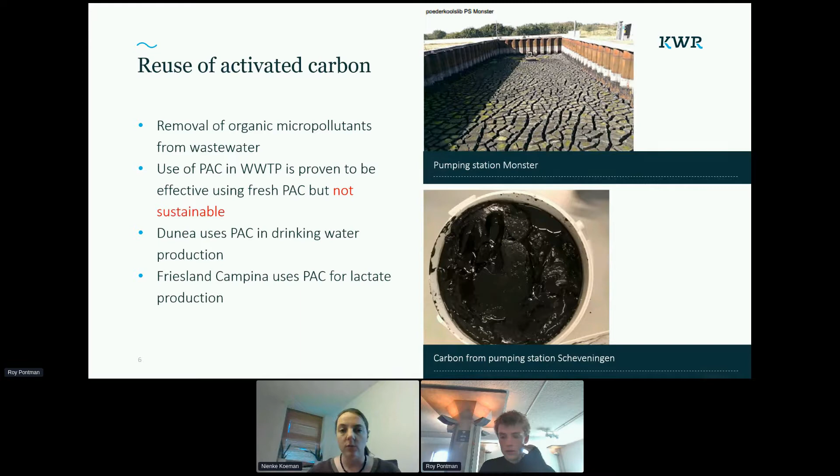For example, Dunea, which is a drinking water company, they use PAC in the production of drinking water, mainly to remove color. And also Friesland Campina is using PAC in their lactate production. And this PAC may still have some capacity to remove other types of components. And the idea of this project was that we can maybe reuse that carbon in the wastewater treatment, and that can be more sustainable. Next slide, please.

So first we have to find out whether this activated carbon is a suitable source to use in wastewater treatment. And therefore, we have to look at the technical and economical feasibility, and also other things like transport. So first, we try to answer some questions. For example, what is the adsorption capacity? Should we dose it as a polishing step after the wastewater treatment? Or should we dose it in the sludge line?

Can we expect problems with other components? Because the carbon is already used, some components are adsorbed, but they may desorb again. What is the concentration of the activated carbon in the slurry, and does that vary a lot between the different sources or per source over time? We have to look at transport, for example, distance, costs, the available volumes, and we will perform a life cycle analysis. Next slide, please.

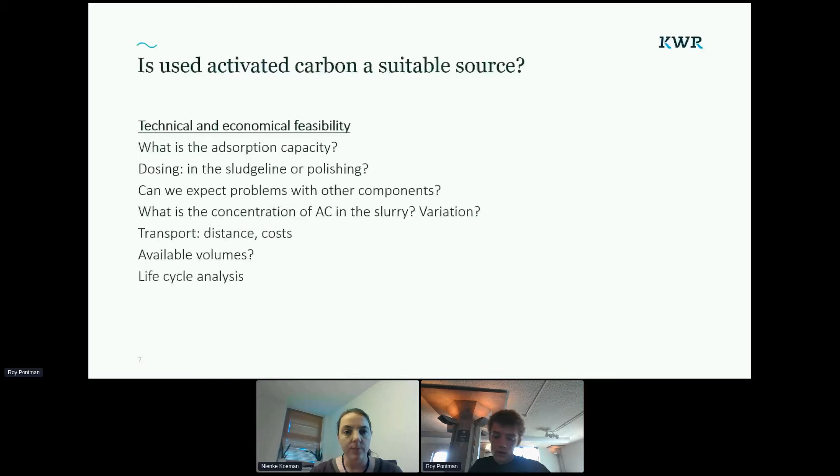So we started with the adsorption in effluent, as a polishing step, and we also looked at wastewater from horticulture. There is some standardized water that is used a lot for horticulture research in the Netherlands, and it contains a mixture of 11 crop protection agents. And what we saw is that if we use the activated carbon from Dunea, we could remove all those components, and the correlation is very good for all the different components that we tested in this mixture.

And what you see is if we add more activated carbon, the concentration goes down to very low concentrations. And the aim is to remove at least 95% of each crop protection agent. And that works if we use this Dunea carbon. Next slide, please.

Of course, we want to know how this Dunea carbon relates to other carbon sources. So we compare it with fresh carbon sources to remove 95% of the individual components. If we look at this table, can you see my arrow? In the column in the middle, we see that the minimum amount of activated carbon required to remove 95% of all the crop protection agents is 50 grams per cubic meter of this Dunea carbon slurry.

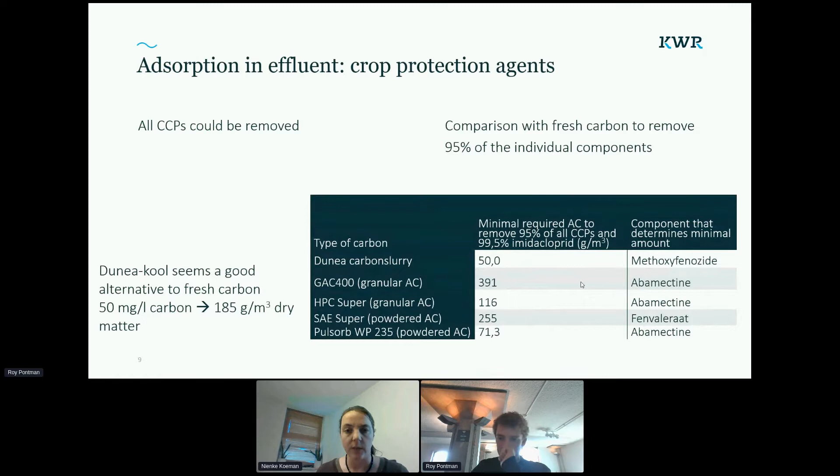We also looked at other types of components, and we used a mixture of components that is used in the Netherlands for wastewater treatment research. It's a mixture of 19 components, of which most are medicines. What we wanted to do is spike the effluent with this mixture of components to guarantee that they are present in the effluent. And we wanted to add representative concentrations, so we looked into data from wastewater treatment plants, what the concentrations could be. And the target is about 70% removal. Next slide, please.

So what we did is we dosed the activated carbon in effluent, so this is as a polishing step. The tables are very small. If we dose about 10 milligram or 15 milligram per liter, we can remove 6 components by 70%. If we dose 20 milligram per liter of fresh carbon, we remove about 15 components by 70%.

If we look at the second table, we see that with Dunea carbon, if we add about 20 milligram per liter, we remove 13 components by 70%. Which means that the amount we need to add to remove 13 or 15 components by more than 70% is more or less the same if we compare the Dunea activated carbon with fresh activated carbon. And this fresh carbon which we use is, according to the supplier, suitable for use in wastewater.

We also looked at the carbon from Friesland Campina, so from the lactate production, and there we saw that there was very little adsorption capacity left, so I didn't show a table. What we see in both the fresh carbon and the Dunea carbon is that the same components adsorb very little, and the same components adsorb very well.

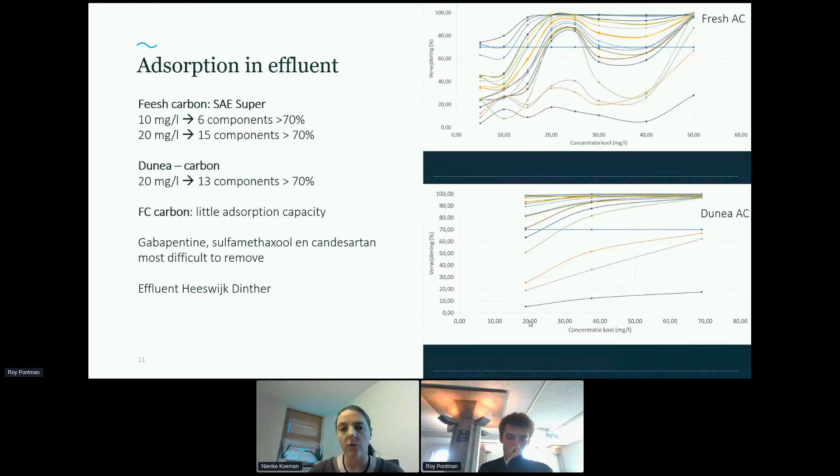So, for example, gabapentin is the lowest line in both graphs, and propranolol is the highest line in both graphs. Which is of course not strange, but it shows us that the system works. Next slide, please. Maybe you can click once more. There's a picture.

What we also want to look at is, instead of dosing it as a polishing step, whether we can dose it in the activated sludge system. So for that we did bioreactor tests, and we used the bioreactor in a sequencing batch mode, so that it's comparable to a wastewater treatment plant.

With the Dunea carbon, we dose it at the end of the aeration period, about 5 or 10 minutes before that period ends, because during the aeration period most of the readily degradable organics are degraded, and then there are OMPs left, and those can adsorb. If we would dose it directly in the beginning, it's probably directly adsorbing all the readily biodegradable organics, and we don't want that. So we will see whether that's a good option.

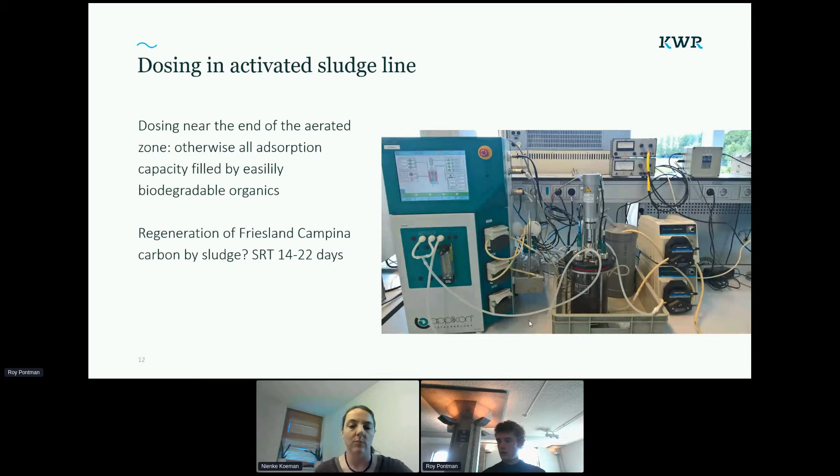For Friesland Campina, we saw that polishing is not an option at all. There are vitamins and lactose adsorbed on the carbon, and what we hope is that when this carbon is recirculated in the system together with the sludge, with a sludge retention time between 14 and 22 days depending on which wastewater treatment plant you're looking at, it's sort of regenerated. It's still really a question whether it works, but we can see. Next slide, please.

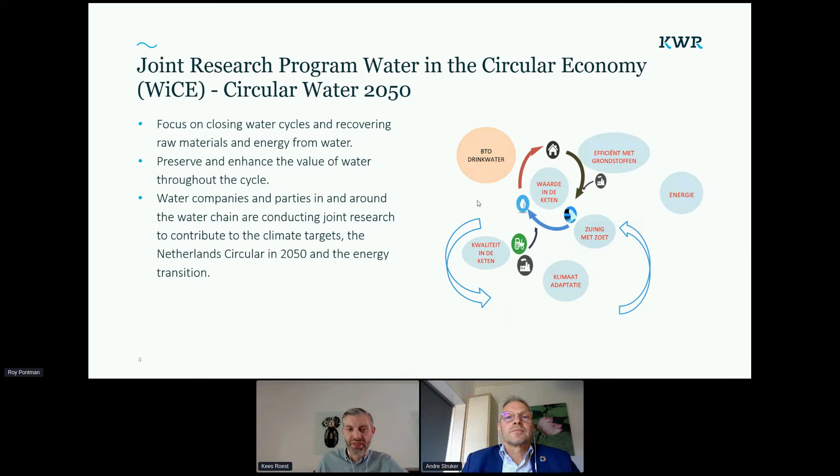And why do we focus on 2050? Besides, it's a nice number, but also because it's the aim of the Dutch government to be fully circular in 2050, which sounds maybe far away, but it's already very soon, because less than 30 years from now we are beyond 2050. So there's not a lot of time to make a transition to circularity. And before you make this transition, you also have to define what circularity looks like in 2050. So those are aspects that we investigated in this project, Circular Water 2050. Next slide, please.

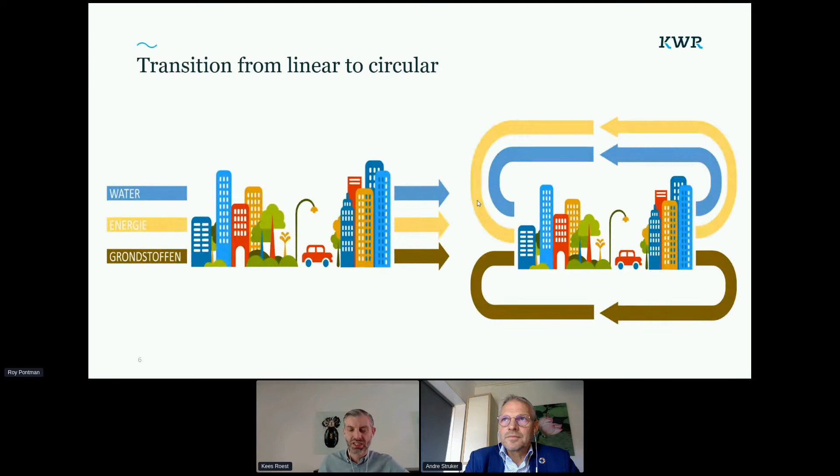Because we have to transition from linearity in water use, energy use and resources to circularity, so to reuse. That sounds easy maybe, but it's more complex and involves a lot of aspects that need to be investigated. Next slide, please. So what we did is three activities focusing on the resources that are used in water treatment, so drinking water treatment and also wastewater treatment, but also the resources that are produced when you are treating this water.

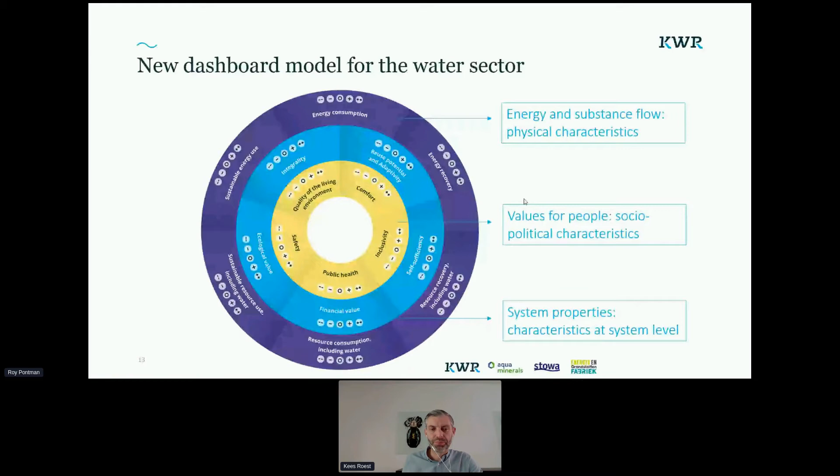So in the social foundation, we have aspects such as public health and safety, comfort. If you are going to reuse components, it can be that there are also contaminants in these components. So it's important that these contaminants are removed and that the components can be utilized in a safe and responsible way. That's why we have these 16 characteristics which can be used as a sort of dashboard to check the circularity of new concepts. Next slide, please.

So what we did, we gathered several people together to discuss circularity in 2050. We made drawings of 2050 and technologies that can be implemented in 2050 for circularity. And all these drawings and input of people from the sector, close to the sector or outside of the sector, we combined into a general picture in the next slide.

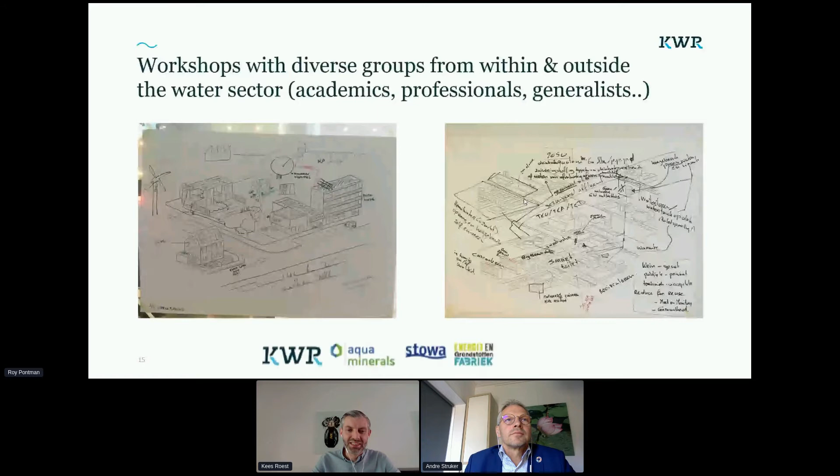This slide depicts a Dutch city and some smaller cities in the background, also agriculture, so a situation in the Netherlands which looks pretty much as it is now at first sight. But in the picture there are a lot of examples and inspiration for possible circularity in 2050. There is a lot of recovery of materials, a lot of blue-green roofs to keep rainwater a bit longer in the city and to have a cooling effect from the green parts. Of course, a lot of sustainable energy, water storage also underground and in other places. So there are a lot of possibilities for circularity.

Also some examples of decentralized solutions, because if you have to extend the existing treatment plant or need very long sewers or tubes, then it can be interesting to have some local treatment. Especially for heat recovery, which is very interesting if you do that locally. For example, from the shower, you can directly implement a heat exchanger in new buildings to reuse the thermal energy. Next slide, please.

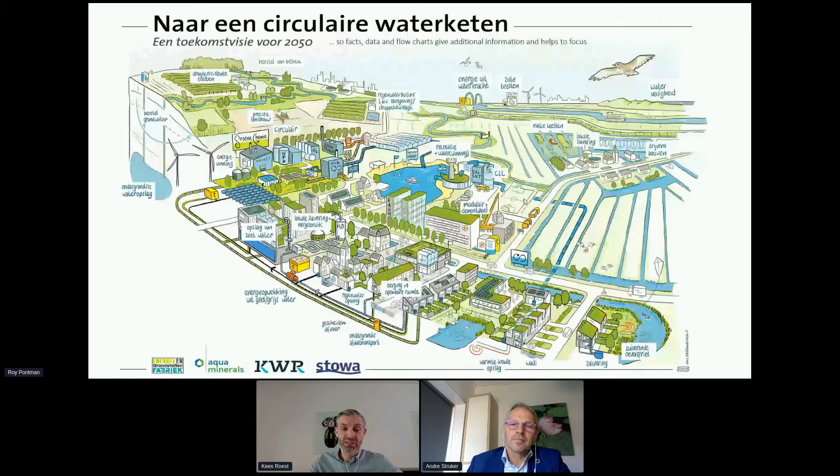So at the moment, as I mentioned, we are still finishing the backcasting. That means not only making a roadmap to this future, but also looking back to current times and then defining which knowledge questions still exist, which innovation needs need to be fulfilled, and especially important, at which moments you need to make choices. That's also depicted in the next slide. If you want to go to this future, at certain times you need to make choices. So if you look backwards, you can define at which moment you need to make a choice, and then also define which knowledge question needs to be answered before you can make the choice.

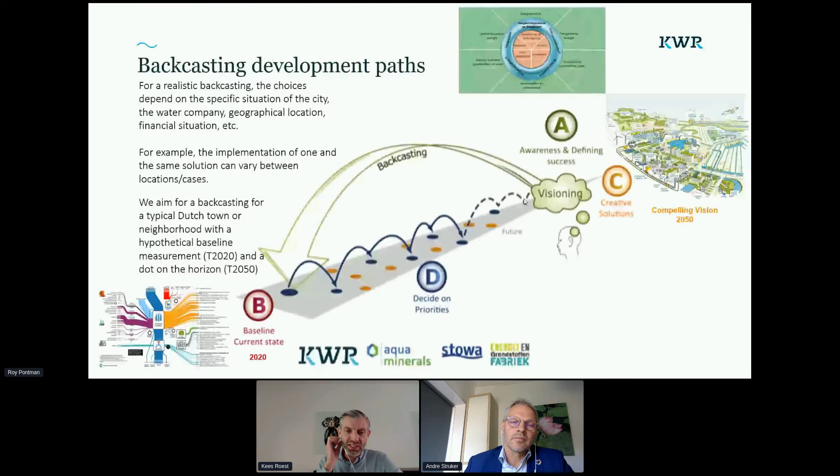So that's very important, I would say. Then the next slide, nearly finished with the presentation. So a bit concluding our study about impact and opportunities for a fully circular urban water cycle, focused on 2050. We delivered a sort of scorecard which can be used for defining circularity. You can compare the current situation with new concepts and the future, and then see if you score better on all aspects or if some aspects are even decreasing in the score. So that can help you to make choices.

We also depicted a dot on the horizon with an inspirational drawing, which should trigger discussion and help us to move forward to a more circular and hopefully fully circular water cycle in 2050. And together with the backcasting, this should give policymakers and administrators, the responsible people, handles, tools to develop towards circularity in the near future. Next slide, please.

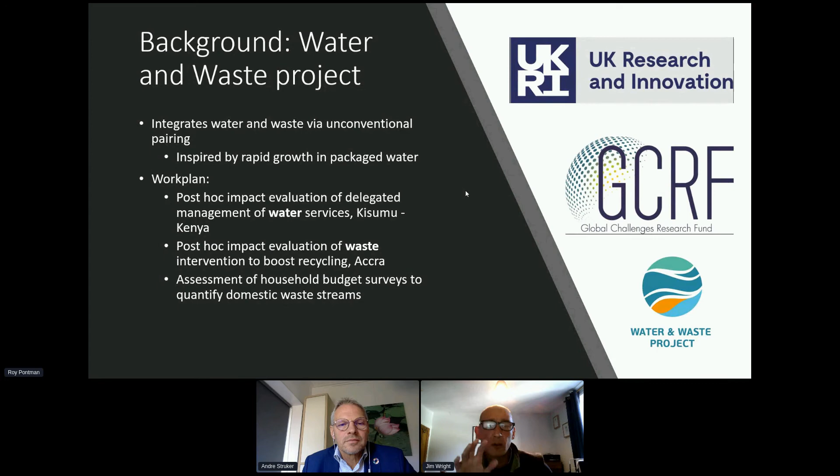As a very brief summary, this is part of a bigger project that brings together the ideas of water and waste management in off-grid areas. Why bring together water and waste? This is a project based in two countries, Ghana and Kenya. In one of those countries, Ghana, most urban households currently drink water from plastic bags. In contrast, in Kenya, the government has banned plastic bags. So the project is looking at evaluating a waste intervention in Ghana and a water intervention in Kenya. Next slide, please.

So let's move on and just talk about the water intervention in Kenya, in Kisumu. It's a particular model of delivering water services known as delegated management. That's a model that's been used in Kenya, in Tanzania, and in Mozambique as well. And as the diagram on the right shows, a utility sets up a subcontract for the local delivery of water services, typically in a high density informal settlement. And that subcontract goes to a master operator. The idea is that reduces non-revenue water loss and hopefully allows some localized expansion of the service network as well, thereby improving water services. Next slide, please.

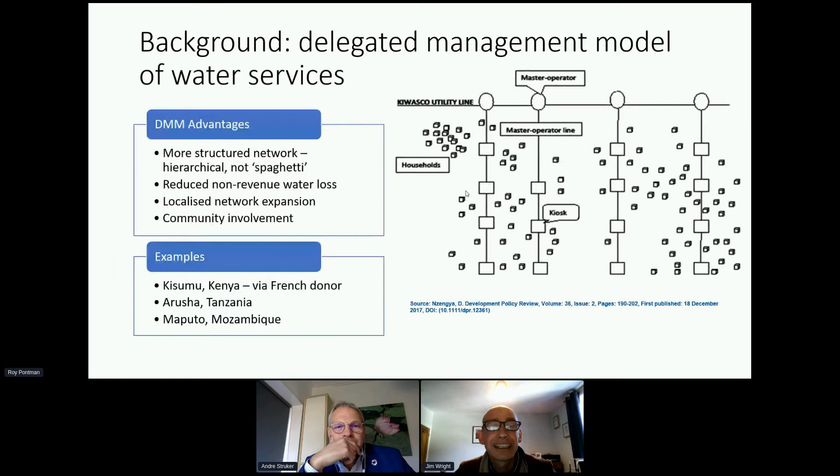So there's been quite a bit of work on the delegated management model. It's looked at things like revenue recovery and also impacts on pipeline breakages. But there hasn't actually been very much on water quality impacts of this style of service delivery. So that's our focus in the project, to look at the water quality impacts. Next slide, please.

So here's a map of Kisumu on the shores of Lake Victoria in Kenya. And if you look at the graphic there, the green lines are areas that are managed directly, pipeline infrastructure managed directly by the utility, KIWASCO. And the red areas and the red lines are places where the water network's management has been delegated, subcontracted to a master operator under this delegated management model.

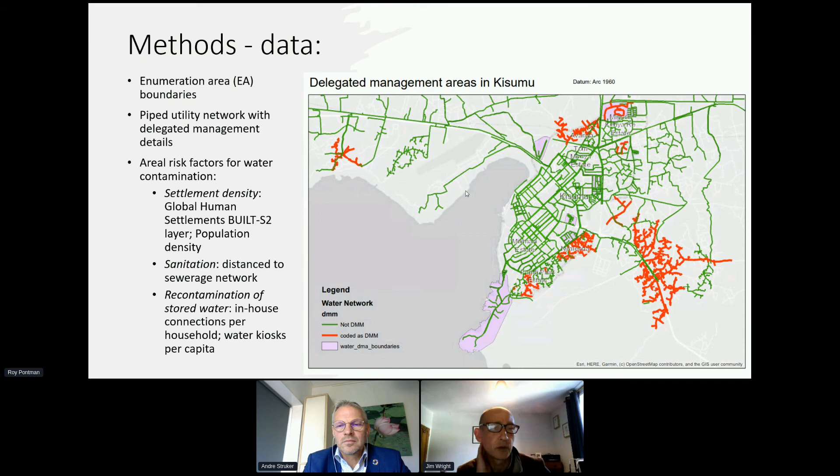And so to do our evaluation, what we're interested in doing is looking at risk factors for water contamination in the built environment and seeking to select control areas that are broadly comparable for those risk factors between the red and the green areas. So, for example, in terms of sanitation provision. So there are a series of risk factors that we've tried to control for, essentially around settlement and population density, sanitation, and also the nature of the connection to the water network. Next slide, please.

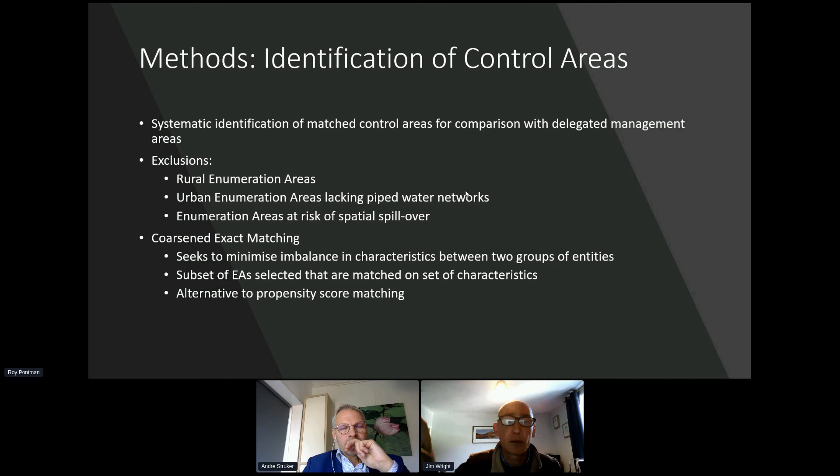So what we've done here is to use a technique called coarsened exact matching that, if you take small areas, enumeration areas, in effect, this statistical technique seeks to minimize differences between the green and the red areas in terms of those risk factors for contamination. And alongside that process of coarsened exact matching, what we also try and do is eliminate those areas that are simply not comparable. So, for example, rural areas and areas that are completely off the piped water network. Next slide, please.

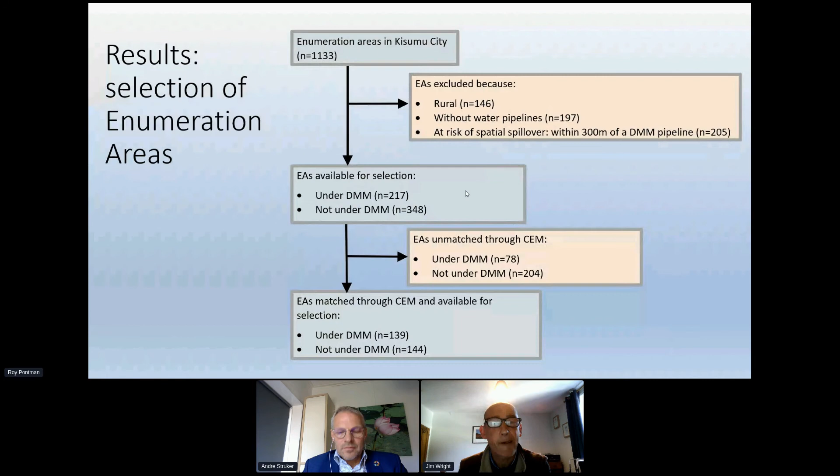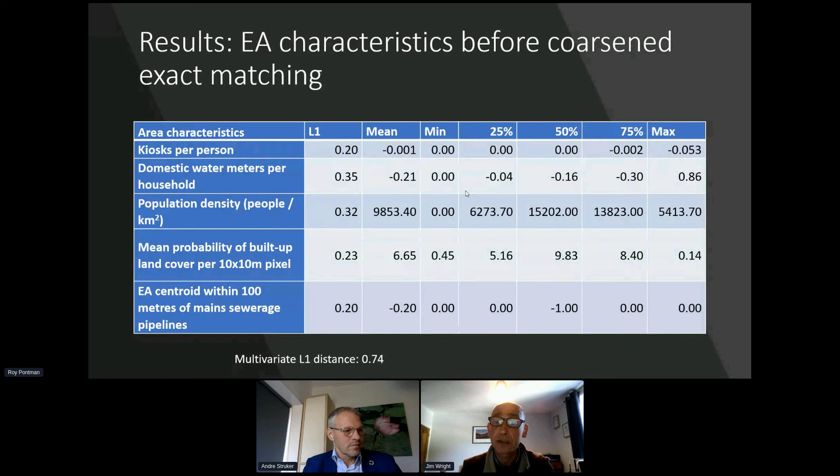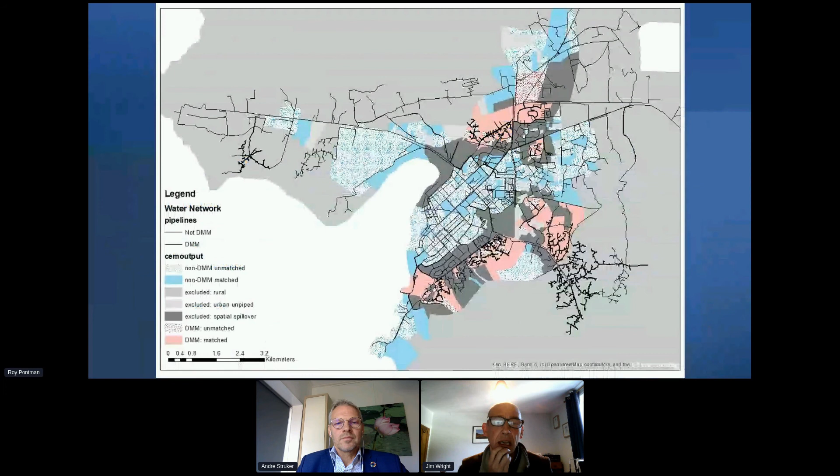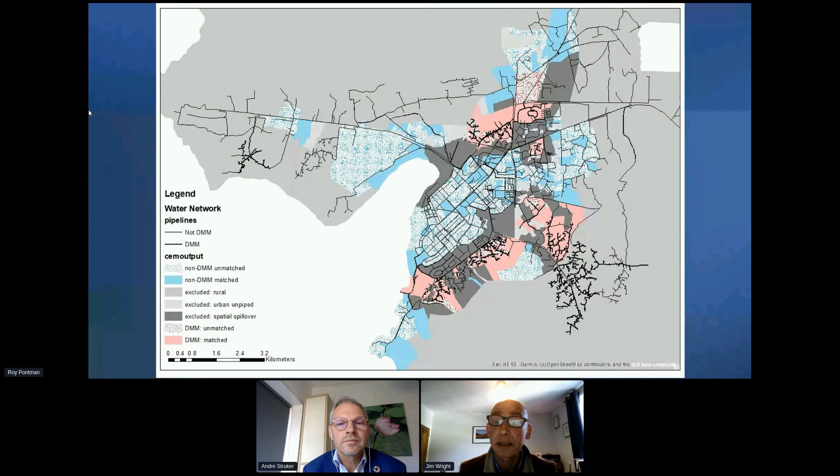What we've got here is a graphic that now shows us how areas have been chosen across the city. So the coloured areas are enumeration areas, DMM in the legend, the red areas, they're under delegated management. The blue areas are controlled directly by the utility. And then those with a solid colour, the ones that are showing in pink and the ones that are showing in a solid blue, those are the ones that have been matched together with comparable characteristics for things like settlement density. The speckled dotted ones have been discarded as being too dissimilar. Next slide, please.

So if you like, what we've done is to use this technique to try and improve the quality of our assessment of the impact of the scheme. So hopefully what we've done is to end up with some carefully matched areas that control for other risk factors

for contamination. And then on that basis, having realised that areas under delegated management tend to be more built up, densely populated, further from main sewerage, more exposed to on-site sanitation, we should be able to sort of control for that and thereby arrive at more robust estimates of the impact of the delegated management on water quality.

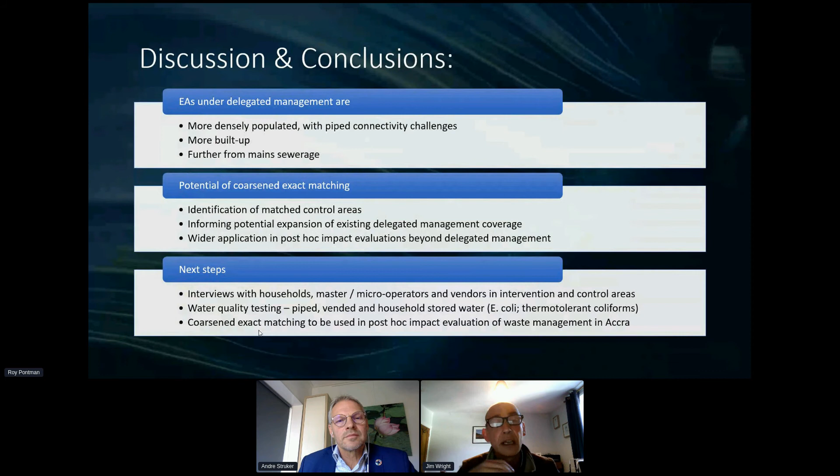And then moving forward, we're now about to start in the coming month, actually, to undertake interviews with households and master operators and vendors in the city, and also alongside that undertake water quality testing, both at source, but also vended water and household water as well, for fecal indicator bacteria, E. coli, thermotolerant coliforms. So that, if you like, gives us a more robust platform for selecting those comparator areas.

Perhaps the final point to make, alongside the idea of using the coarsened exact matching for impact evaluation, is that perhaps it also enables some structured decision making in thinking about places where the delegated management scheme could perhaps be extended to. So if you were thinking about extending the arrangement further, maybe this gives a sense check of the similarity of the areas that you might extend into.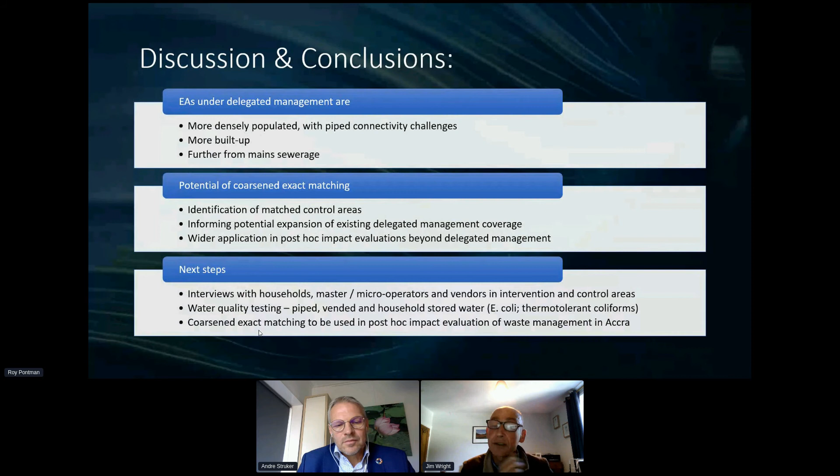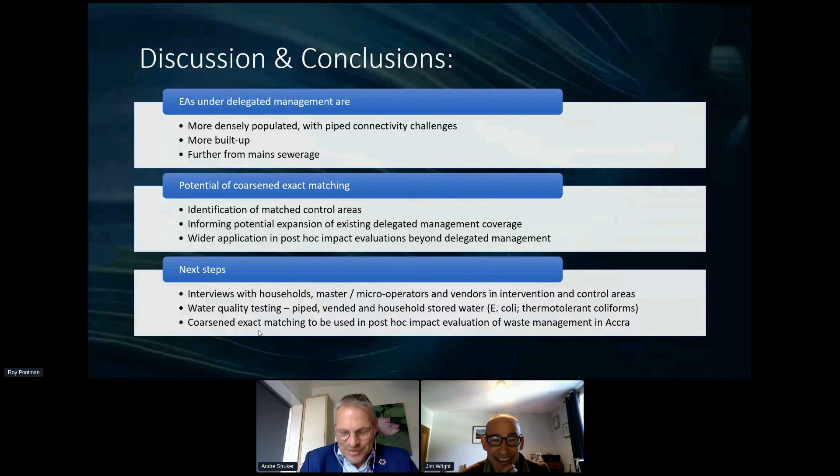So on that note, I'll maybe stop speaking and hand back across to the moderator, Andre. Andre, I think you're on mute, are you?

Thank you, Jim, for giving us some insights in your work in the African region. One question I have for you is, where do you hope this project will stand in 3 years' time, let's say? That's a good question. I would hope that we would be able to share knowledge across the two countries is one of the key things that I would see as important.

So we're due this month to have a meeting where the delegated management model, which is unknown in Ghana and not used, where KIWASCO from Kenya will be speaking to colleagues in Ghana to discuss the potential of that model, including with University of Ghana. So one of the things that I would hope is that there will be dissemination of ideas between the two countries that are involved in the project.

Okay, thank you. Thank you, Jim, for your presentation. For the last minutes, I think we try again with Nouri Daya. Hopefully the connection is now better so we can understand you. Please go ahead, Nouri Daya. I'm still not hearing you very loud and clearly. No. Maybe you can switch off the video. Maybe this helps. I think this is not going to work, Nouri Daya. It's a pity because I was very interested in your research you're doing.